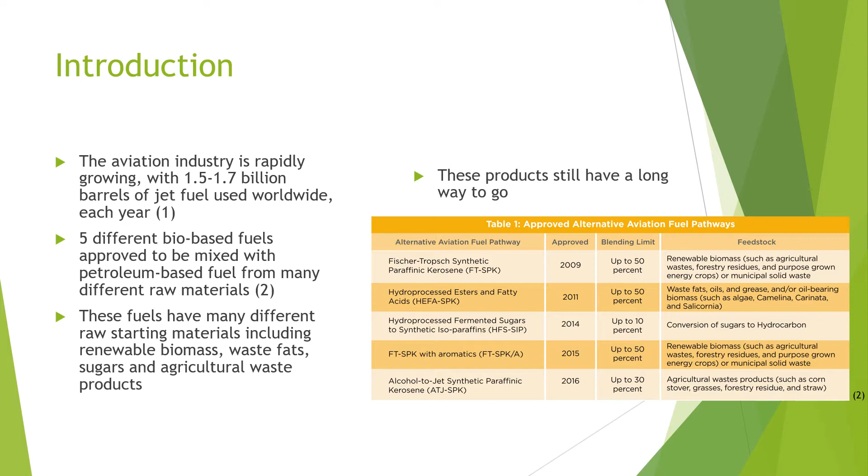Since the first commercial flight powered by biofuel in 2008, there has been a boom in research into bio-based alternatives for aviation fuel. There have already been 5 different fuels approved since 2009 to be mixed with petroleum-based fuel in amounts ranging from 10% to 50% for use in commercial aviation. These fuels have many different raw starting materials, including renewable biomass, waste fats, sugars, and agricultural waste products. However, these products still have a long way to go.

The production of aviation fuels is essential for air travel. Aviation vehicles cannot run on electricity. It just doesn't have the capacity to provide the needed outputs to run air transport machinery. Therefore, this sector of the transportation industry requires a dense liquid fuel. The idea of an aviation fuel made from lipids is to displace or completely replace petroleum-based fuel without having to make any alteration to current engines.

Petroleum-based aviation fuels have many negatives, the biggest being their environmental impact. From use, they release significant amounts of carbon into the atmosphere. From extraction of the raw materials, they create even more carbon emission, but also leave hazardous scars both physically and chemically to the surrounding environment. If no improvements are made, in just 15 years, the amount of carbon in the atmosphere from emissions will be more than double in magnitude.

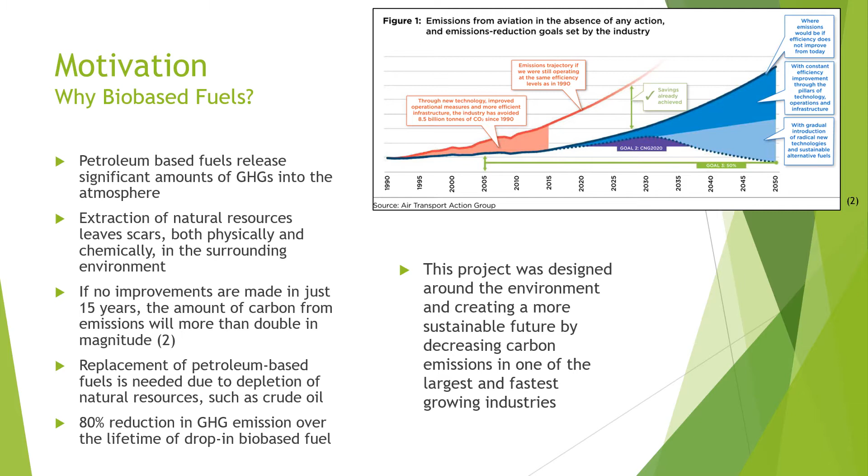On the other hand, bio-based aviation fuel, especially from lipids, has the potential for lower cost raw materials as well as a much smaller carbon footprint, making it the better option. However, this process is still more expensive than petroleum-based fuels and still has a long way to go. This is the motivation for this project.

The first step for any project is to well define the problems and questions that need answering. The main question that needs answering is how can a quality aviation biofuel be synthesized through hydrotreating lipids to compete with traditional petroleum-based aviation fuels? This leads to some more specific follow-up questions.

What processes already exist? How can these processes be upscaled for commercial production? What is the best feedstock to use, for cost and for the environment? And for a given feedstock, what are the best operating conditions and catalysts that give the highest yield percentages? We use these questions to guide us throughout the project and development for aviation fuels from lipids via hydrotreating.

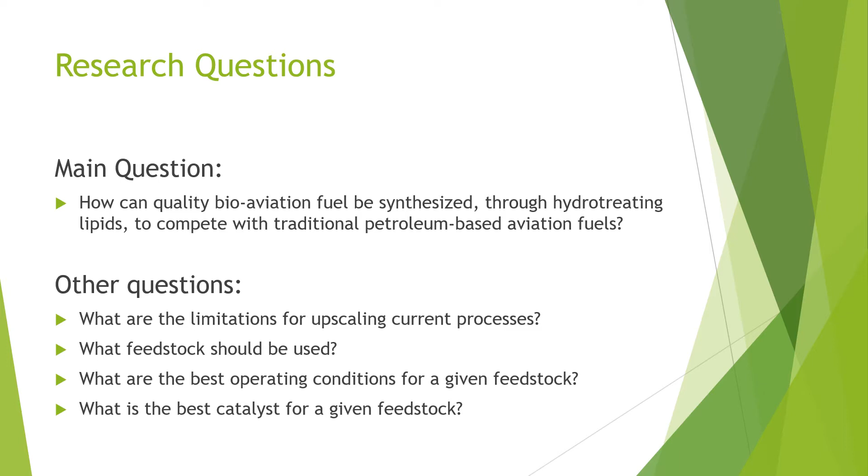So by far the largest hurdle that the bioaviation fuel industry faces, and frankly, the biggest wall that is preventing the global adoption of biofuels, is its significant production price. Per ton, bioaviation fuel nearly doubles the cost of petroleum-based aviation fuels. And especially with how quick global aviation is increasing and how quick fuel demand is increasing, if we really expect biofuels to completely replace fossil-derived fuels, a reduction in price is needed. It won't be able to compete with fossil fuels currently.

Now, one of the ways we can reduce cost of production of biofuels is to simply scale up production. The larger the production, the lower the operating cost per amount of fuel made. The problem with this is the feedstock industry and distribution chain isn't well adapted to handle large production loads. Essentially, the production is outpacing the supply, and especially with demand and competition with other industries such as the biodiesel industry, prices are further skyrocketed.

A solution to this is just to use more feedstocks. Now, this doesn't directly reduce the price of feedstocks in the market, but it does dissipate demand over multiple industries and reduce competition, which indirectly would reduce the price. Now, to use multiple feedstocks, you have to have a very flexible catalyst, and that is exactly what we use and what we designed our process around.

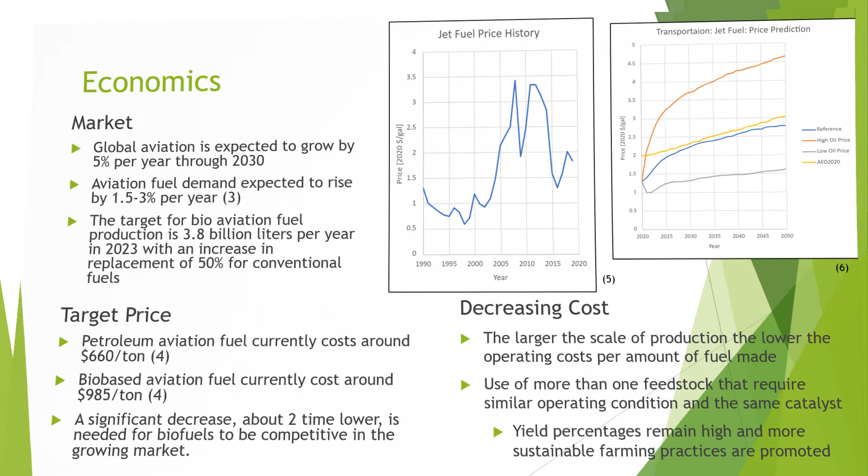So there are multiple chemical pathways that can produce biofuels from biomass. One of these pathways is hydroprocessing. Now, hydroprocessing is in fact one of the more desirable and has the most potential to dominate the industry because of how similar it is to current fuel production plants. The chemistry itself is very similar. In fact, hydrocracking, which is used in this hydroprocessing of biofuels, is used in the production of fossil-derived fuels. So plants can be modified and upgraded to accommodate biofuel production.

Now, there are two classifications of hydroprocessing: hydrotreating and hydrocracking. Hydrotreating is a less severe reaction environment than hydrocracking. Hydrotreating removes contaminants such as oxygen, nitrogen, sulfur, and separates the triglyceride into three individual glycerides. At this point in the process, the majority of it will be diesel, about 90%.

Then these diesel grade hydrocarbons are fed into the hydrocracking reactor, which splits the long chain carbon into kerosene grade hydrocarbons, C9 to about C15. Now, this process is very energetic and exothermic, and has the more extreme optimum reactor conditions, that being 350 to 450 degrees Celsius and 40 to 110 bar.

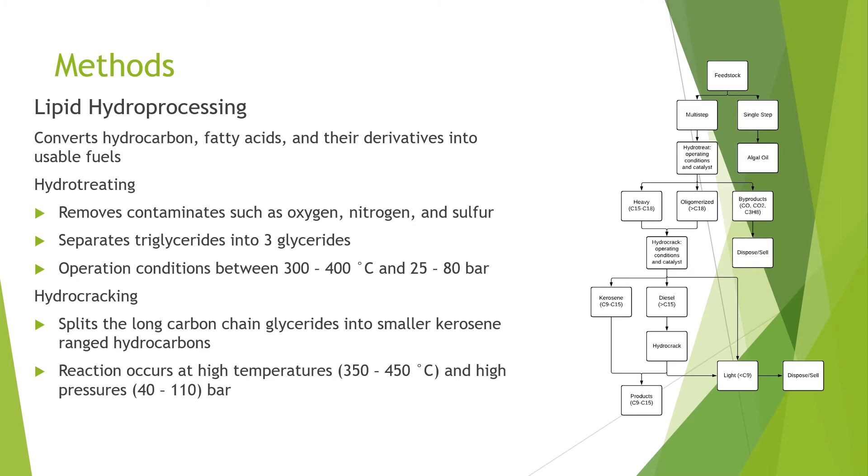So both the feedstock and the catalyst have the greatest potential at achieving a significant price reduction in the production of biofuels. Now, the feedstock contributes, just by itself, about 70 to 80% of the overall production costs. The feedstock needs to be able to produce high levels of aviation grade kerosene while maintaining and even improving its competitiveness with fossil derived fuels.

Now, there are numerous feedstocks out there that have significant diesel and kerosene yields, but the desired reduction in price cannot be achieved with a single feedstock. Multiple feedstocks are needed. This allows the demand for those feedstocks to be spread out over multiple industries. It allows the competition to be reduced, reducing prices further. And it also allows for a reduction in land usage to grow these feedstocks.

Now, the triglyceride oils that we used were sunflower, soybean, and palm oil, all of which have extremely similar operating conditions and yields while using the same catalyst. Now, the catalyst we chose needed to have great stability, lifespan, regeneration ability, and yield potential. To even get on this list, stability, lifespan, and regenerability needed to be great. Spending too much on the catalyst would increase the production costs.

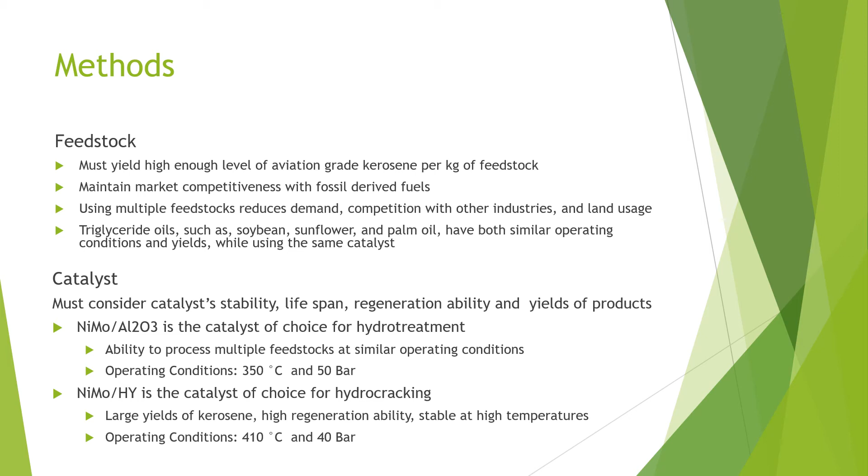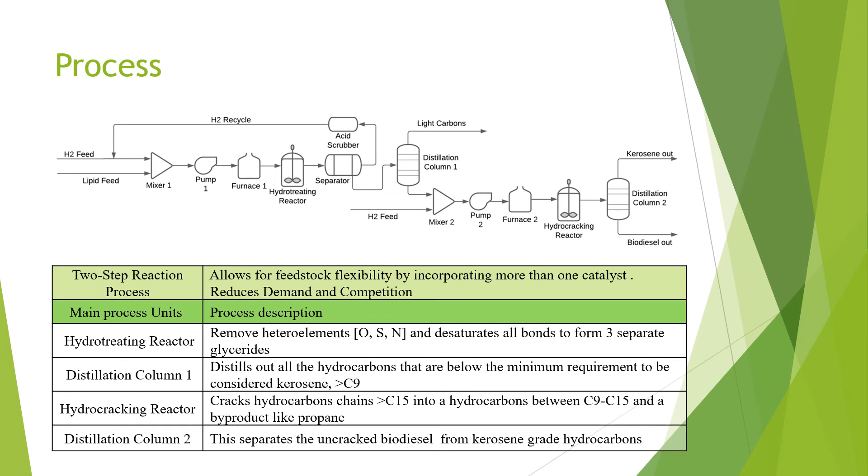So here's a simplified version of our Aspen model, only representing the major units that were used. We have the mixer, the furnace, the reactor, the separator, and then the distillation columns for the hydrotreatment and hydrocracking. It's important to point out that there are two additional distillation columns. That is because to achieve the necessary purities in the product streams, distillation columns operated in series were required, especially after hydrocracking. The product stream was composed of significant portions of diesel, kerosene, naphtha, and lighter hydrocarbons. The first distillation column separates the diesel from the kerosene, and then that distillate is fed into a second distillation column where it separates the kerosene from the naphtha and potentially lighter hydrocarbons.

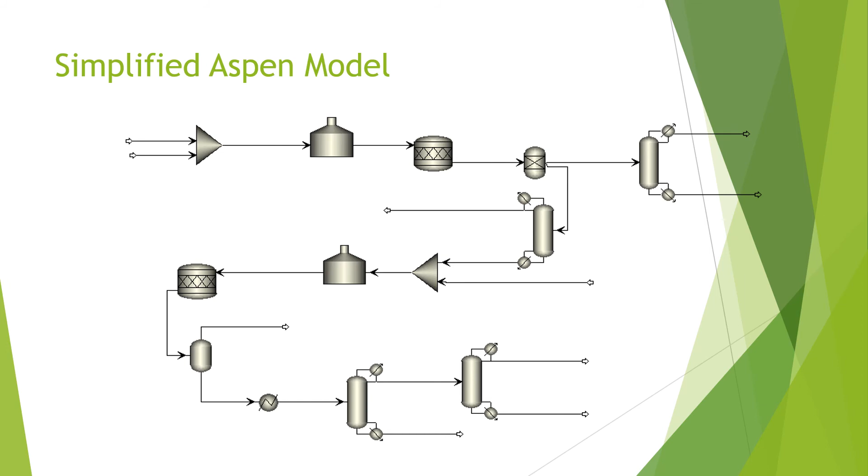The sections of our process mentioned in the preceding slides are generalized and simplified on this slide here. As you can see, the feedstock section pertains specifically to triolein due to it being an ideal triglyceride with zero impurities and a single unsaturated bond. Both the hydrotreating and hydrocracking reactors were modeled with RStoics and were used to contain all reactions and get any potential yield values. Additionally, we have the separator, which is intended to separate byproducts and excess reactants from hydrocarbons. We also have two distillation columns, in which the first is used to separate the light and heavy hydrocarbons, while the second is used to separate kerosene and unreacted diesel.

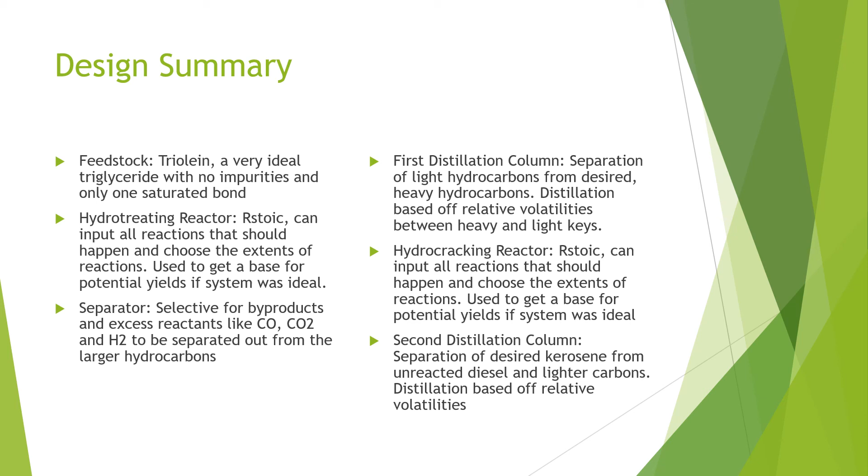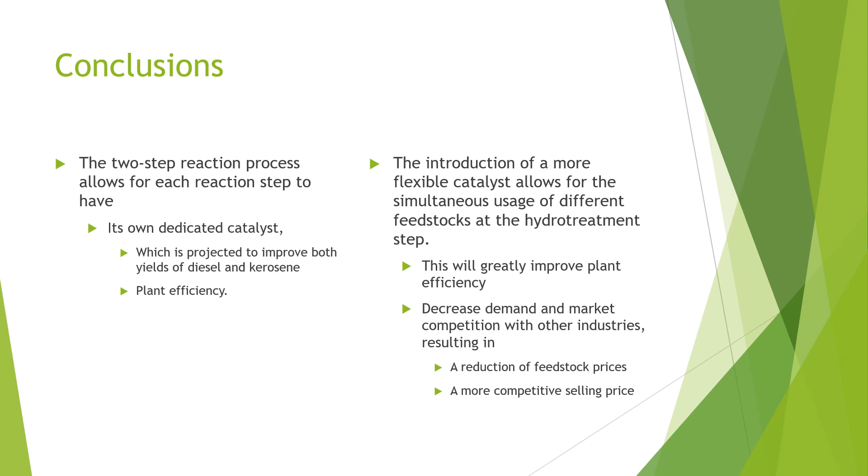In conclusion, some of our questions were answered and some are still in the process of getting answered. We concluded that the two-step reaction process is the best for both cost and yield. It allows each step to have a dedicated catalyst, which is projected to improve both the yield of diesel and kerosene in addition to plant efficiency. The introduction of this flexible catalyst also allows for more than one feedstock to be used at the same time. The benefit of this is increased plant efficiency and decreased demand and market competition with other industries, causing a reduction of feedstock prices and more competitive selling prices.

This project still has some work that needs to be done. A more rigorous economic analysis is needed to better understand how much operating the process and purchasing raw materials will cost. A life cycle analysis is also needed to better understand when the process needs to be shut down for cleaning and when the catalysts need to be cleaned or replaced, as well as how the quality of the end product, kerosene, will be affected by long-term production.

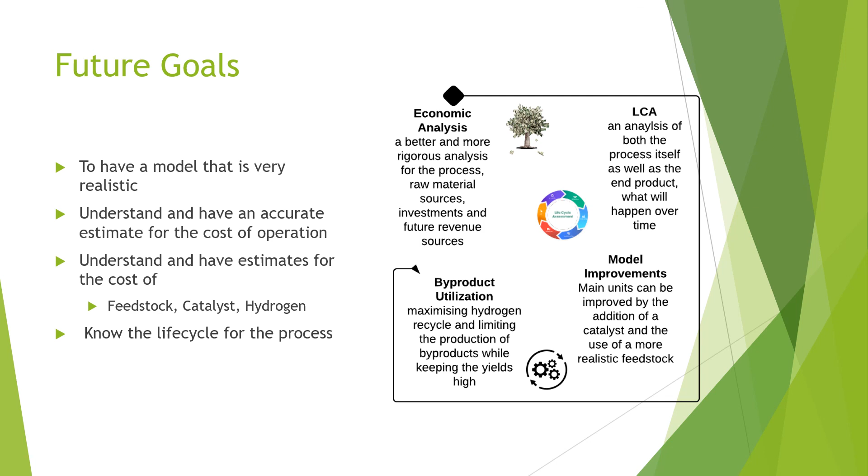The most important thing that still needs to be done is improving the model. This means adding a catalyst to the system and using a less ideal, more realistic starting feedstock to better understand the needs of the process. This also includes better utilization of excess reactants and byproducts, such as separating out excess hydrogen for recycle back into the feed stream and recycling uncracked diesel back into the cracking reactor. Once these are done, more improvements can be made to decrease the cost of production and increase the yield percentages.